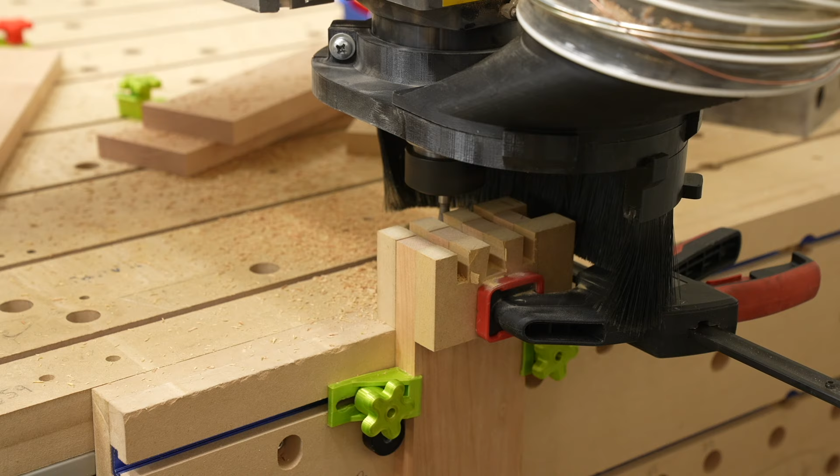Hey guys, this video is all about doing dovetails on the CNC. First, I'm going to talk about how to design dovetails in Autodesk Fusion 360, keeping in mind that you're actually going to be making it. Second, I'm going to discuss toolpaths in Fusion for how to machine out the dovetails without any chip out. And third, I'll show how I set them up and cut them on my CNC machine. This will be broken up into 3 videos, and the links for the other two will be in the description, so if you're interested in just that part, you can jump to those videos directly.

Okay, inside of Fusion, let's go ahead and create a new component. I'm going to give it a name of the drawer. Hit OK. And when we create it, it's already active, which is what we needed. Let me show the origin for that component.

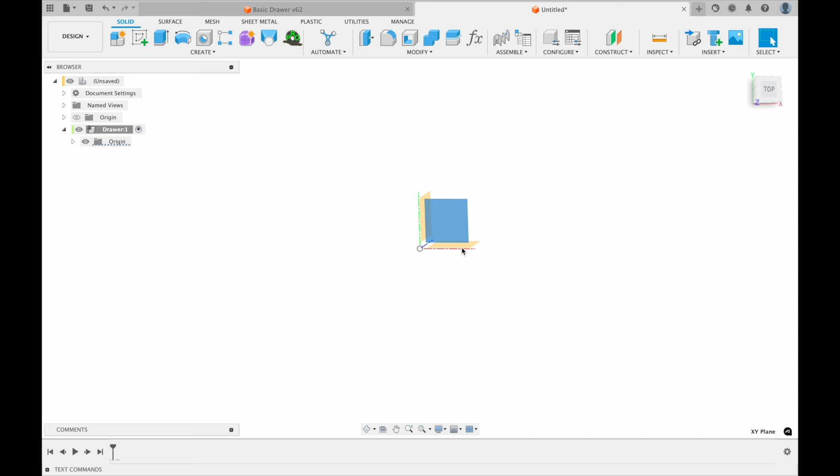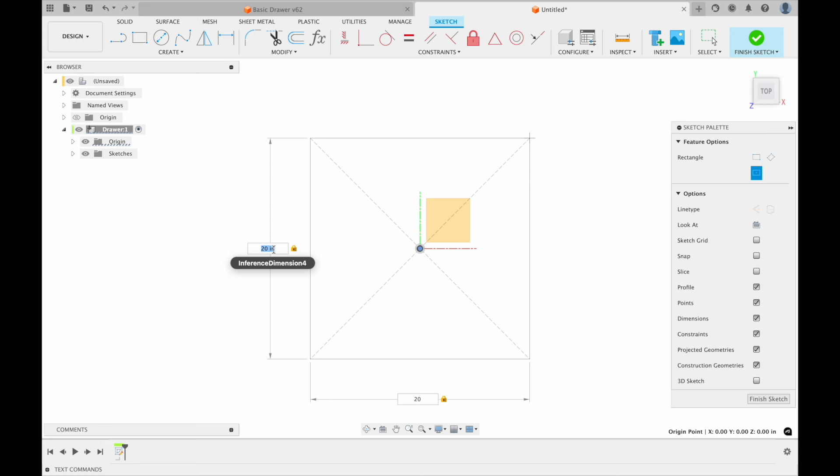Let's select the top plane, right click, create sketch. Let's go ahead and create a rectangle, center rectangle, and I'm going to select the origin as the center, and let's do the size of our dovetailed drawer. Let's do 15 by 20. 20 inches this one, 15 that one. And if I was going to do this for real, I would create parameters in the change parameters. Instead, we're just going to hard code it.

Now I want to offset these. Hit O for offset, and I'm going to select the edge here. I want to offset each individual one, and it'll become apparent why in a minute. So I'm going to uncheck chain selection, and we're only going to select a single curve. The distance we're offsetting is the thickness of our dovetail. Let's do 3/4 of an inch, and we want to go inside, negative 0.75.

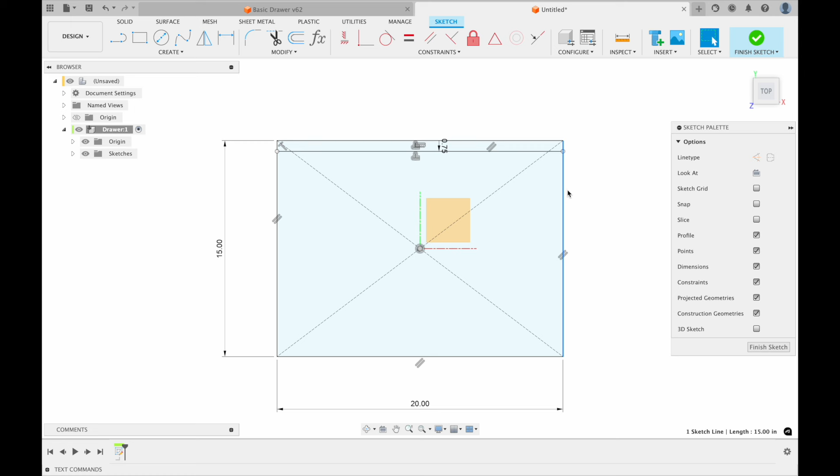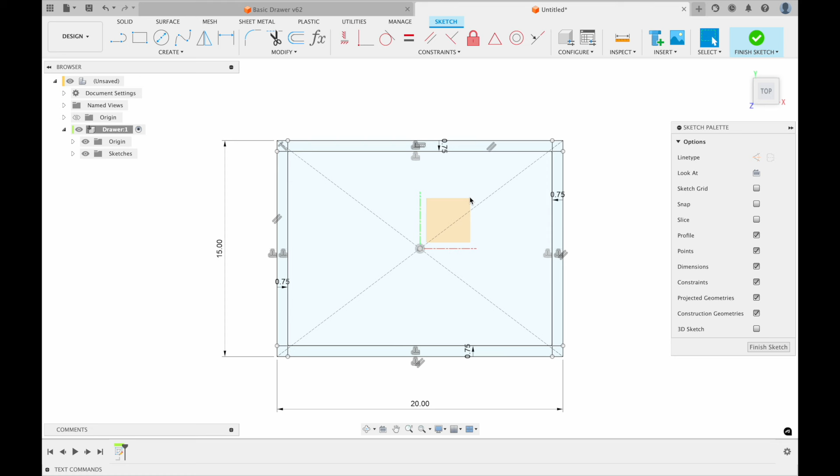Alright, and then I'm going to do the same thing for here. O for offset, and paste in this value, enter. Select this guy, O for offset, paste in the value, enter. Now we can go ahead and finish the sketch. Let's expand it, and let's name this drawer base.

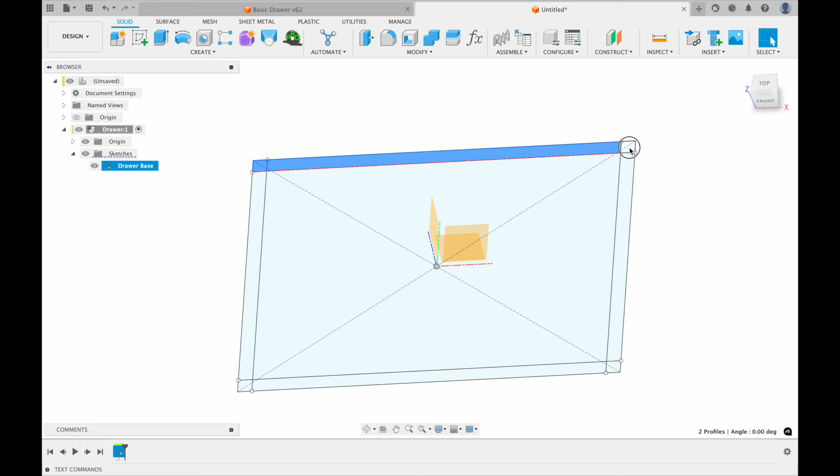Now we can start extruding the sides. I'm going to go ahead and select this profile, this one, and this one. Hit E for extrude, and let's go by the drawer height. Let's say we want the height to be 6 inches. Looks a little big, let's go with 5. And again, I would normally use parameters.

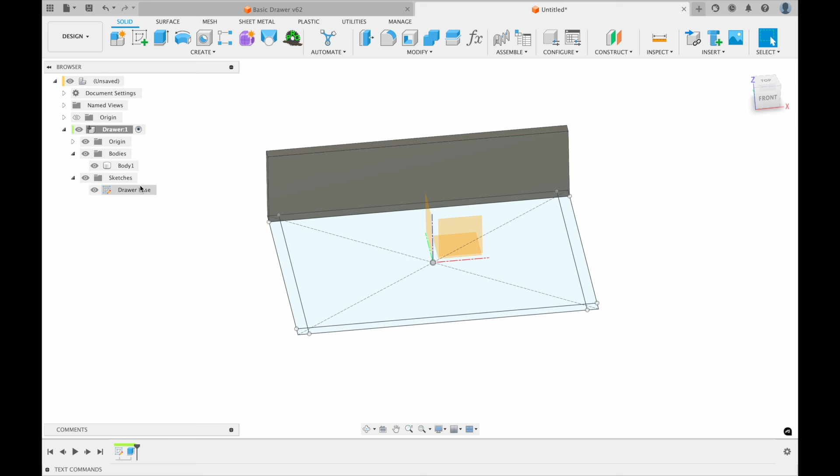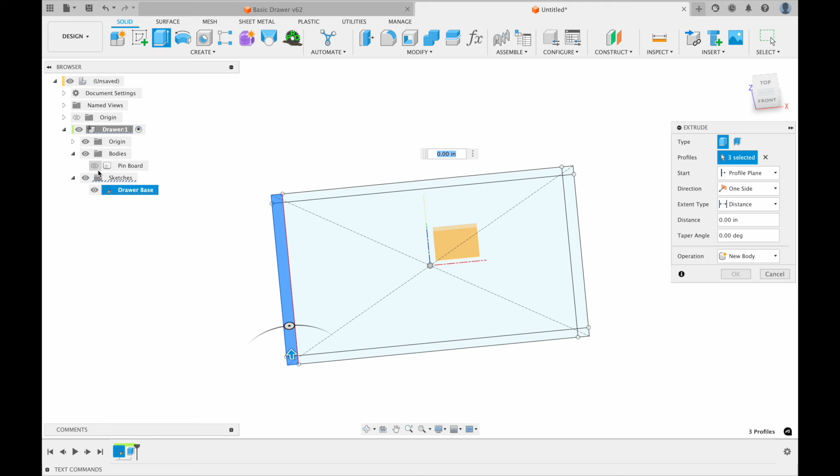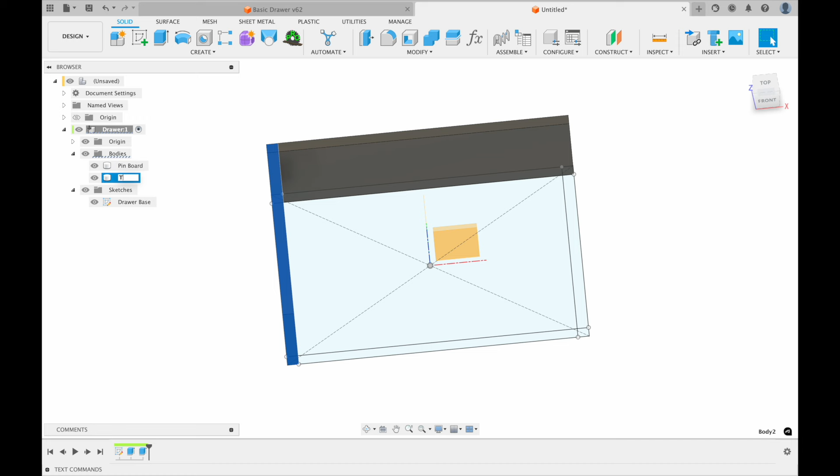Okay, let's go ahead and rename this body. The long one's going to be the pin board. Now let's hide the pin board and create the tail board. Go ahead and select the 3 for the other shorter region, extrude it, E for extrude, and we could do the same distance. I'm going to show the pin board, and let's just go to the top of the other one by selecting this, and we don't want to cut, we want to create a new body. Hit OK. So this is going to be the tail board, so I'm going to rename it.

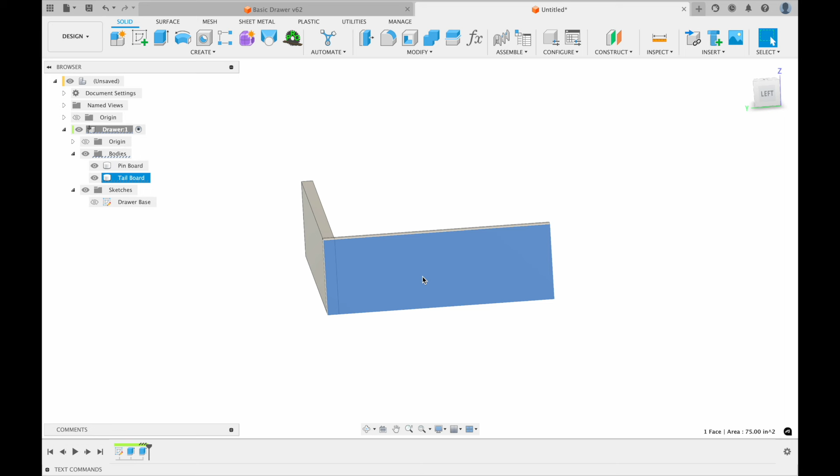Now we can go ahead and start actually drawing the dovetails. I'm going to hide the origin, and we don't need this drawer base sketch. I'm going to select this face on the tail board, and we're going to create a sketch on the tail board, create sketch. I'm going to zoom in a little bit, and I'm going to hit P for project, and I want to project the one other board. We can just easily do it by selecting the body.

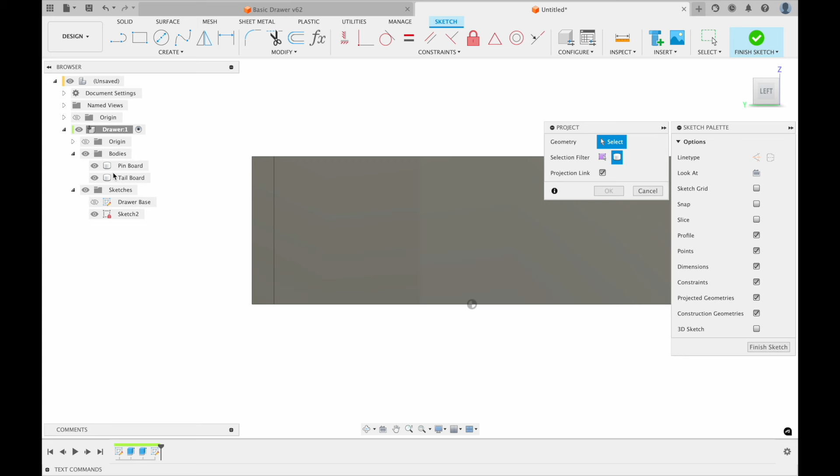We could actually do both of them, the pins and the tails. There are settings in Fusion to auto project. You can hide the bodies, and I'm going to rename this sketch to what I'm working at, and we're going to call it the pins. And I want to create symmetrical ones.

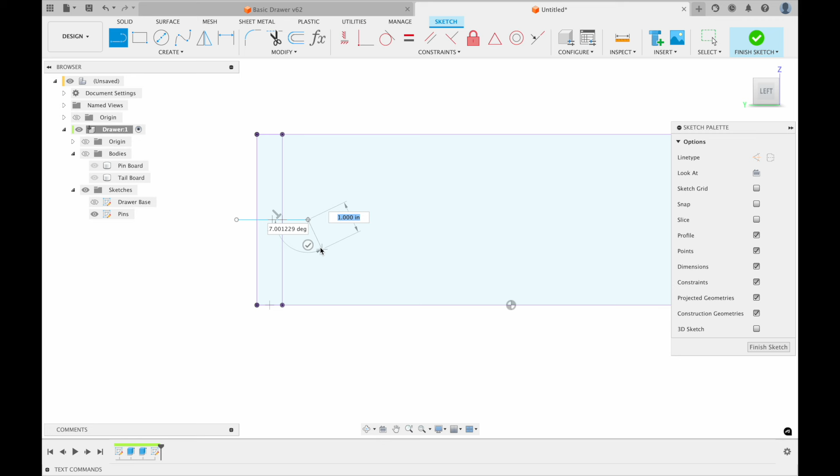So the first thing I'm going to do is create a line that's going to be for mirroring. I'm going to hit L for line, and I'm just going to move the cursor down the left side until the little triangle appears, and that's going to give me the center. Go out a little bit, drop a point, clicking, and then another one here. Then hit OK, and I'm going to hit Escape to exit the line tool, and select this line. We're going to just keep it here.

And let's go ahead and add constraints. I'm going to just drop this to these lines here, and constraints are created. So now we want to draw the line for the dovetail bit. I'm going to hit L again, and the dovetail bit would come in and go here like this. Now, to make it a little more obvious, let's change the orientation to make it a little easier to see.

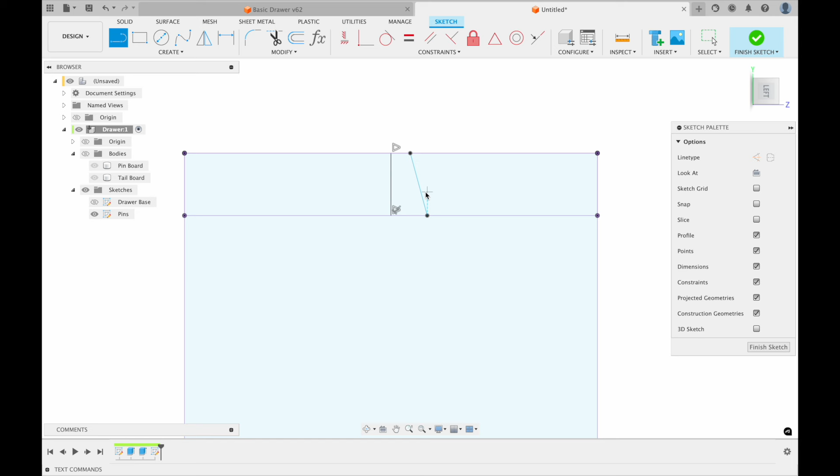Now we need to set this at a particular degree for the bits we're actually going to be using. I'm going to create another line that's perpendicular up, just for reference. I hit Escape, select it, hit X to make it a construction line. It goes to dashed.

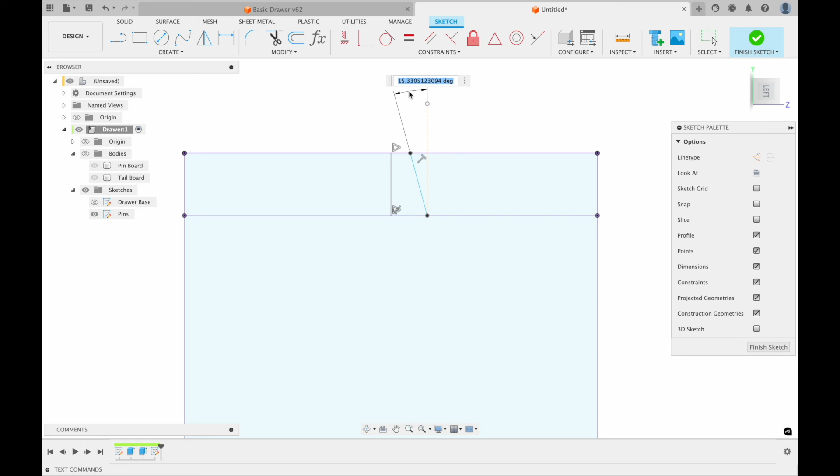Now I can select the construction line and my other line here, and create a constraint for the angle. I hit D for dimension, and we want to dimension the angle at 8 degrees, since an 8-degree dovetail bit is going to be used.

Okay, great. So hit Escape to stop creating dimensions. I can kind of tweak this around. Now what I'm going to do next is mirror it against this line here.

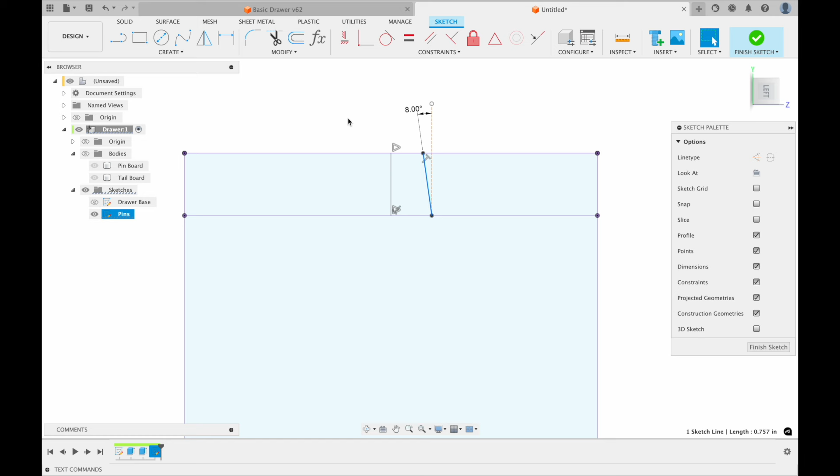So I'm going to select this, type S for search, and type mirror. We want to use the bottom one because that's the one for sketches. Mirror the line that's selected, and the mirror line, the place where it's mirroring at, is going to be this one. Hit OK, and that mirrored this shape here.

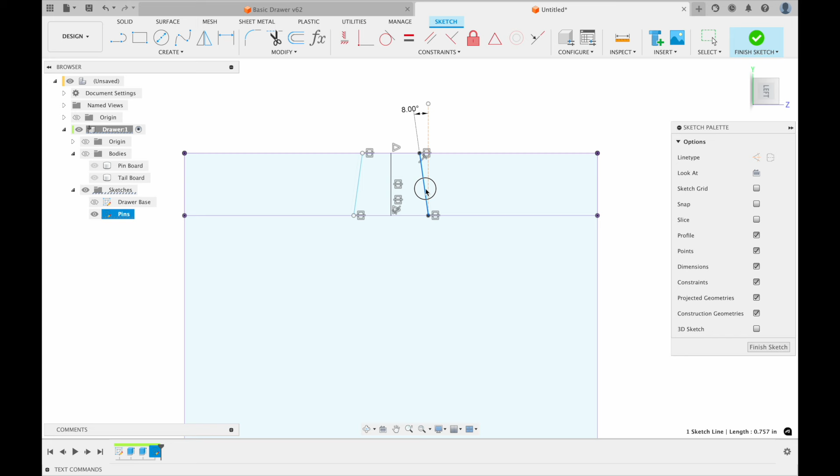We could tweak it, and again we'd want to parameterize it. We want to make sure that this bottom distance is at least as wide as your dovetail bit. That would be the basic tail that we could cut out right here. So we're going to start with it just like that.

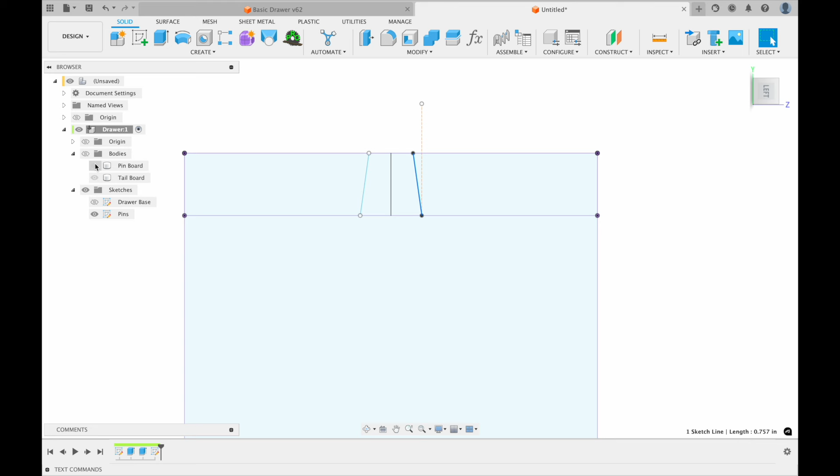Hit Finish Sketch. And let's show the tails. Hit Show the bodies. Let's hit the Home button. And let's show both just for easy use. Okay.

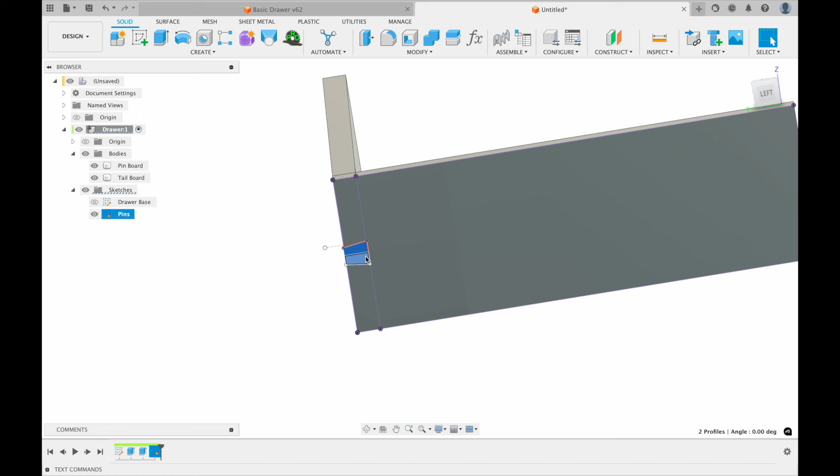Alright, so now we got to chunk this out. I'm going to select those two, and maybe I should have actually, in the pins, made the middle line a construction line. So I'm going to hit X and select it.

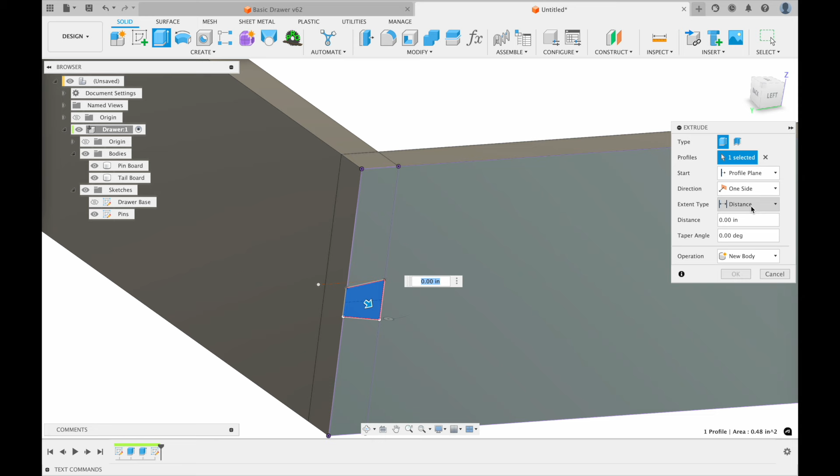Alright, so now I can select this profile here. E for extrude, and we're going to extrude to cut it out, which is what we want to do. We want to cut from this side and go all the way to an object, the inside here. You can see it's red, implicitly it goes to cutting.

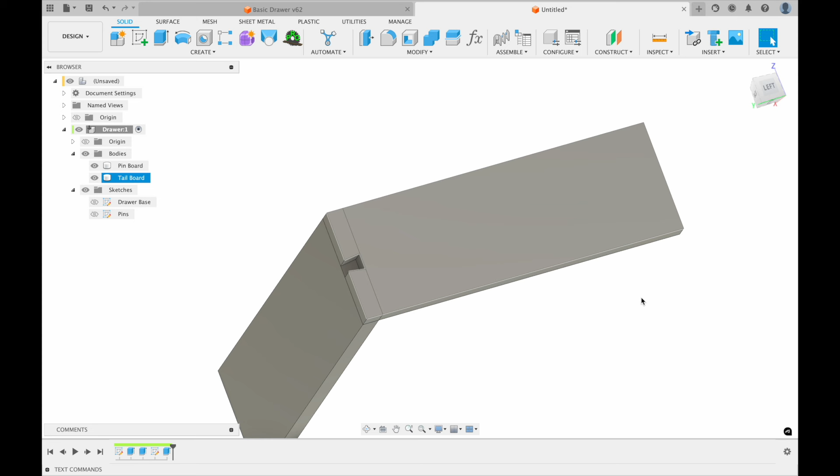Now we only want to cut the tailboard because that's what we're making right now. So hit OK. Alright, so that cut a hole in the tailboard. And yeah, that's great.

Oop, it cut a hole in both. So I made a mistake. Double click. We only want to cut the tailboard. Alright, let's hide the pin board for now.

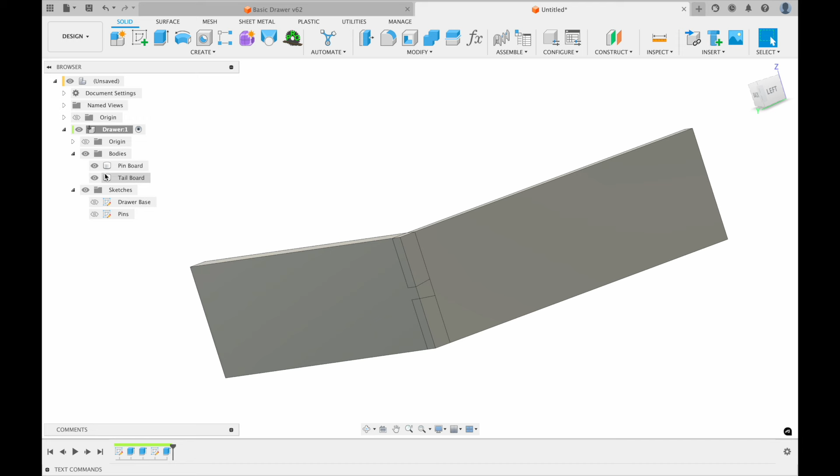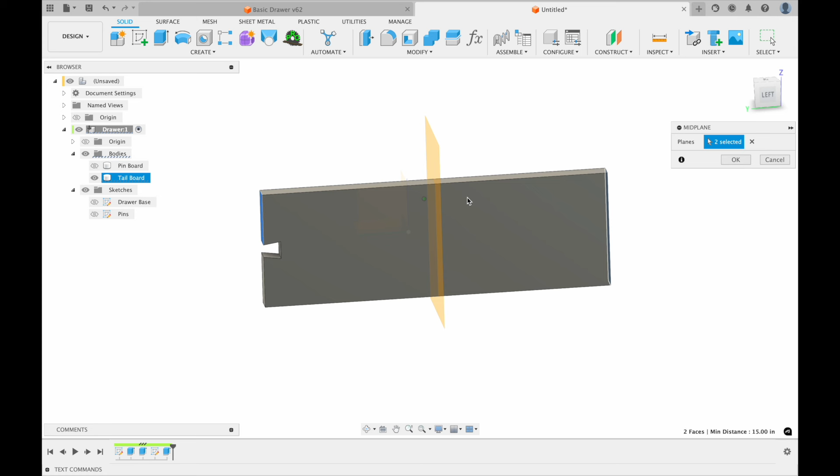Next, I want to mirror this shape from here, from this left side to the right side. We're going to go Construct and a midplane. Select this plane here, this plane here, and now I created a plane directly in the middle of those two faces.

So now I can create a mirror. Let's do a mirror, and I can never remember where anything is, so usually I just search for it by typing S. So let's do S, mirror, select it.

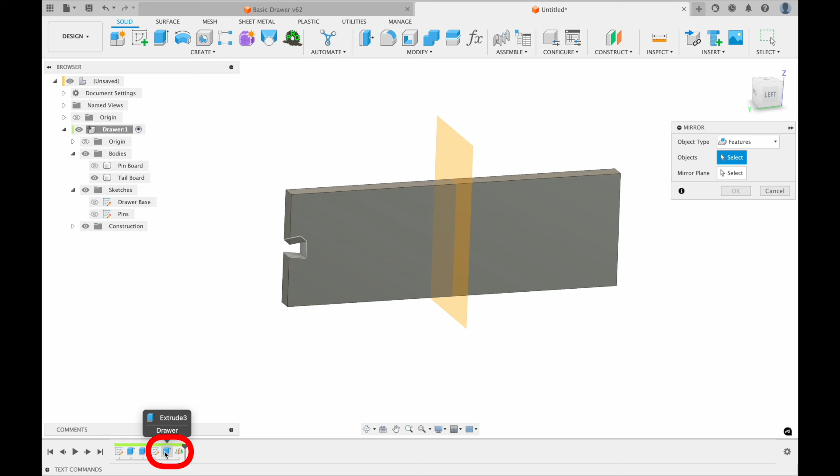What do we want to mirror? Well, I want to mirror this hole, which was a feature. So I'm going to go to Feature and select it, this one in the timeline. And then the mirror plane, hit select, there's the plane, and then hit OK, and it chunked it out.

Alright, we can hide the construction plane. We want to go and create a pattern to replicate this up and down on both sides. Create a pattern, a rectangular pattern. Perfect.

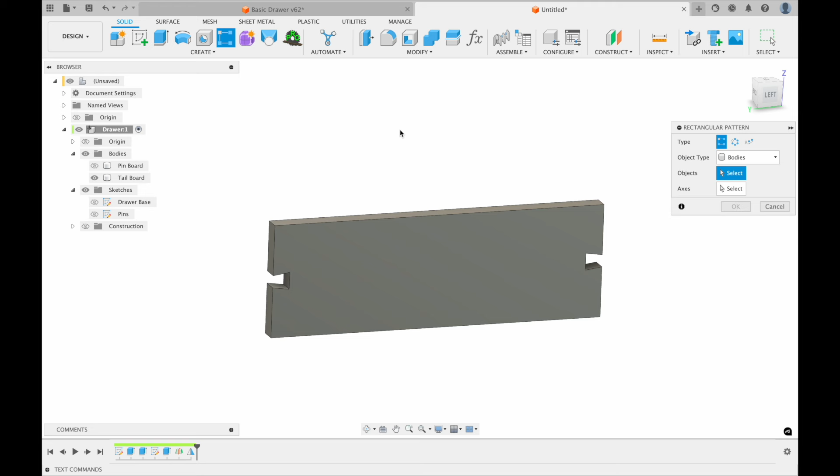We want to create a pattern of the feature, a pattern of the chunk out on the left and then the mirror on the right. So those two are selected. The axis, we want a pattern up and down, so I'm going to select one of these edges.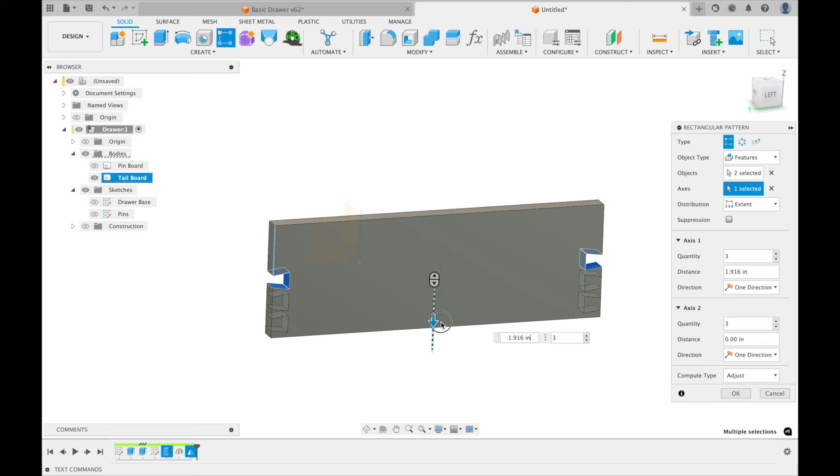And now if we drag up and down, we can see we're creating a replication of the tails, or actually the pin cutouts. And I want it— it's only going down, we want to go both ways. We also don't want to go left and right.

So on the other axis, I'm going to go to 1. And the up and down, we could change the amount in just a second, but let's change the direction to be symmetric. And now we can add a few more in.

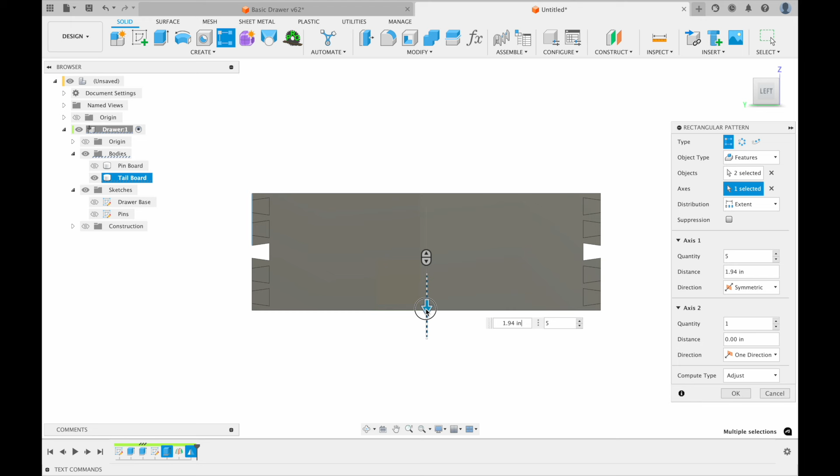So we need, it looks like an odd number to make it work correctly. And again, you can kind of space these out however you want, depending on the sizes of what you want for things. This is another area where it's nice to make it parametric.

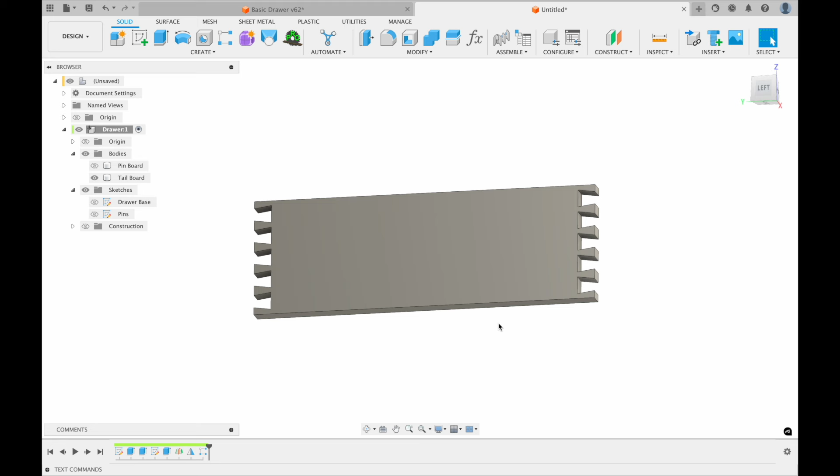I'm going to hit OK. And we created the tailboard, a bunch of dovetails. Alright, so now that we have that, we can go ahead and work on the pin board.

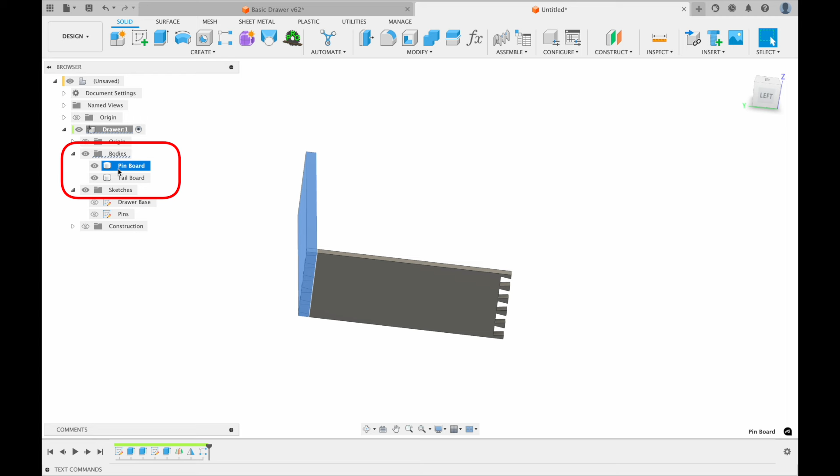First we need to chunk out this shape from the pin board, which means copying it over to the other side. We want to do it with components, so I'm going to start making components at this point. Shift click on each of these, right click, and create components from bodies.

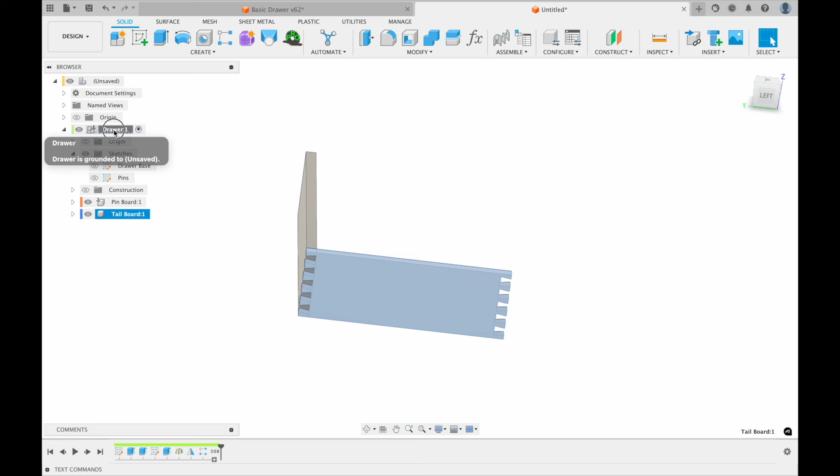That created them now as components. This tailboard I want to replicate, so right click and select copy, or Command C or Control C. Right click on my component up here, the drawer, and do paste. I'll just hit OK and not do anything for it.

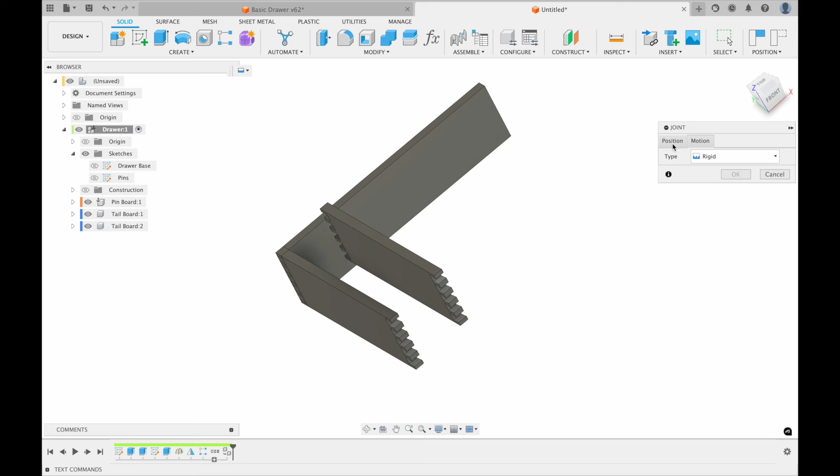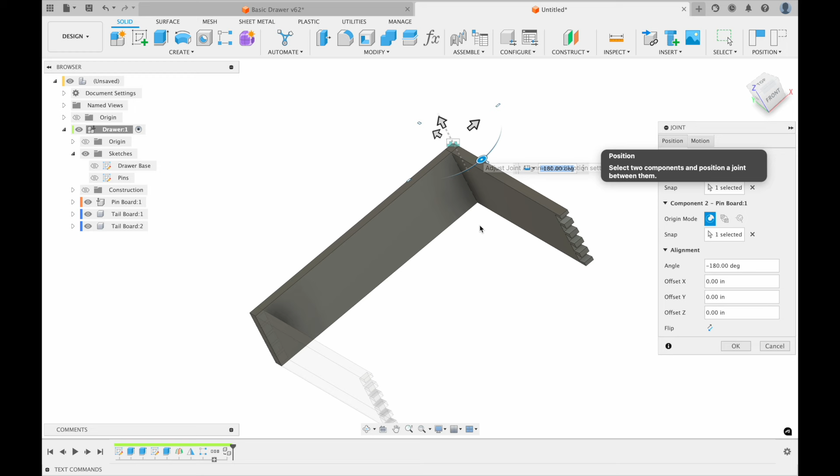What I want to do now is create a joint. I want this edge over here to be over there, so I'll do a joint. It's going to be a rigid joint, and the position is the hard part. I want this little corner here to go all the way over to this corner, but turned 180 degrees. That looks right.

Could also create a joint for the original one, an as-built joint between this guy and this guy. That looks right. So now everything is jointed and can't be moved.

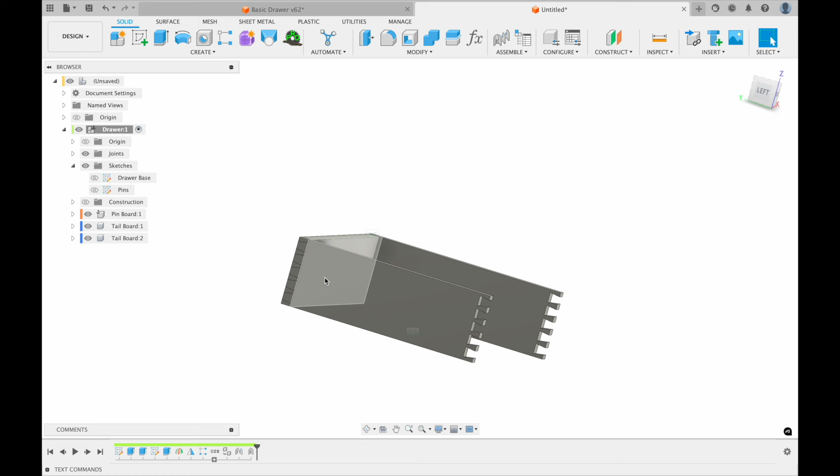Now that we have those two instances, we can work on the pin board. We don't need to activate it since we aren't creating anything new, just modifying. I'm going to hit combine. The target body is going to be this pin board, and we're going to use some cutters as the tool bodies, selecting cut.

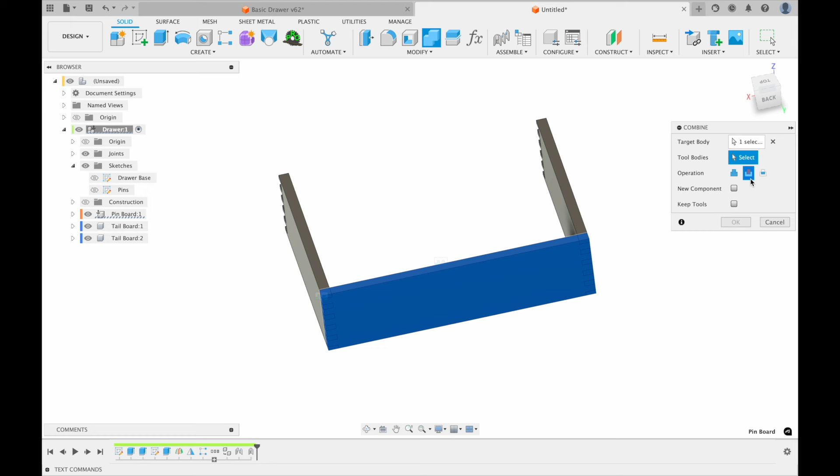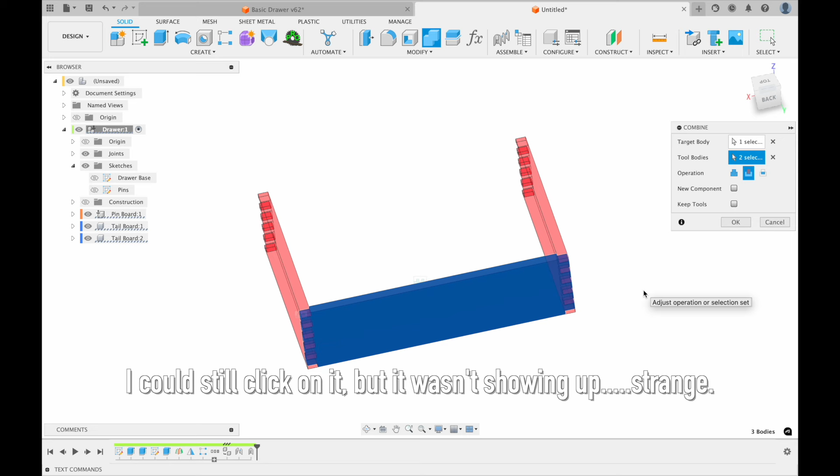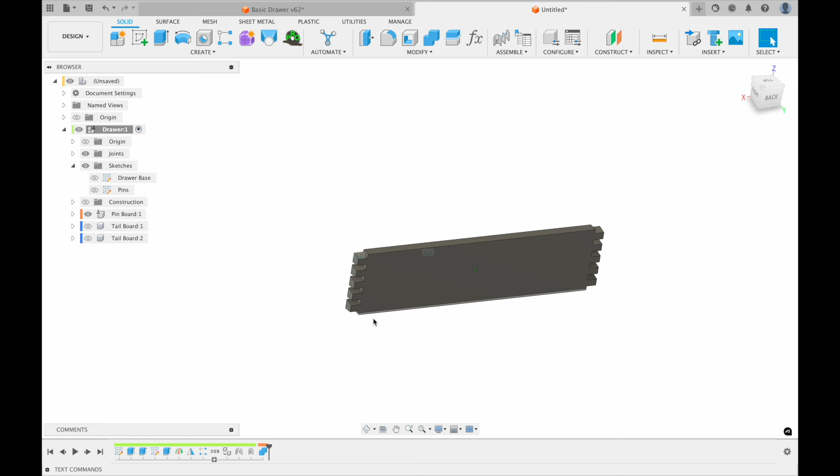The tool bodies are going to be this side and the other side. Alright, so I selected both. I'm not sure why it disappeared temporarily, that was a little strange. We want to keep them. Now if we hide the tailboards, you can see we have the pin boards cut out.

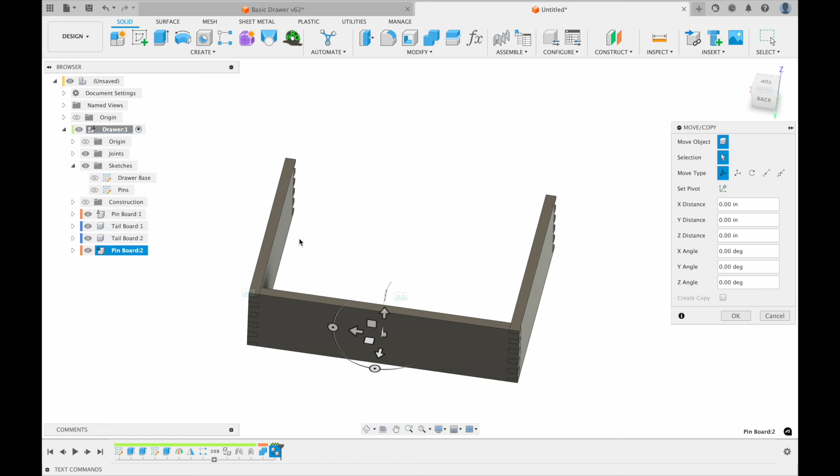So all we'd need to do now is create a joint where this one goes on the other side, and that would complete the box. Let's click on the pin board, right click, copy, drawer, right click, paste. Alright, so now this one needs a joint. It's also grounded right now, so I'll right click and unground it.

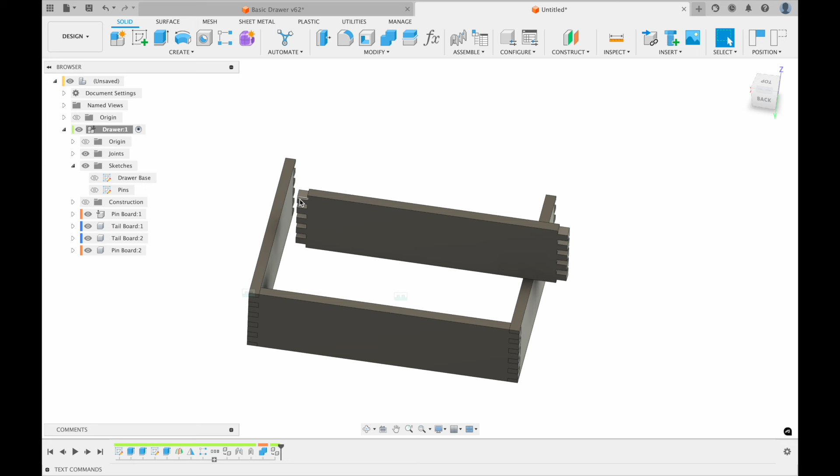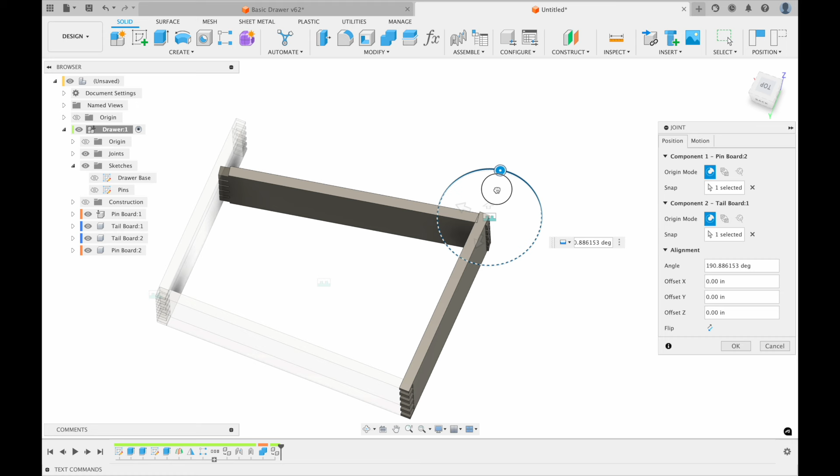We want to rotate it around so everything's in the correct orientation. That means this pin piece needs to go over here. J for joint, this little guy here needs to go right there. And then it's rotated wrong again.

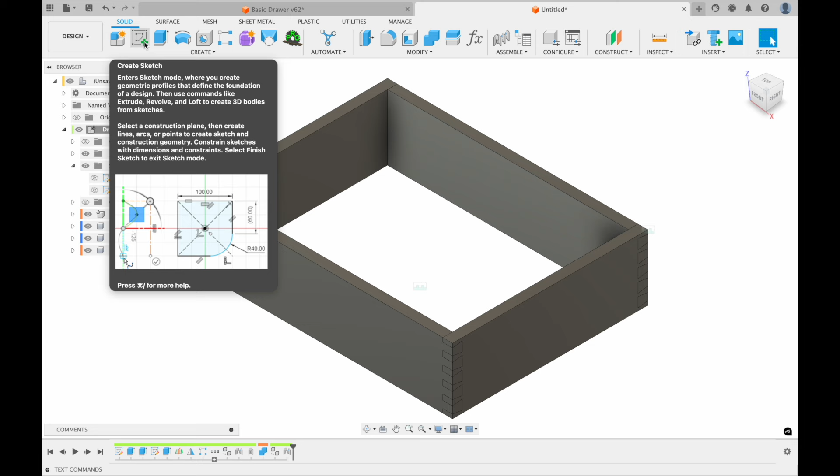So that's the basic dovetail box. We'd also want to add a bottom. Let's go back to the home orientation. There are other ways of doing this, but let's just do it one easy way. Go ahead and create a sketch on the bottom of one of these, R for rectangle, and have it snap to each corner.

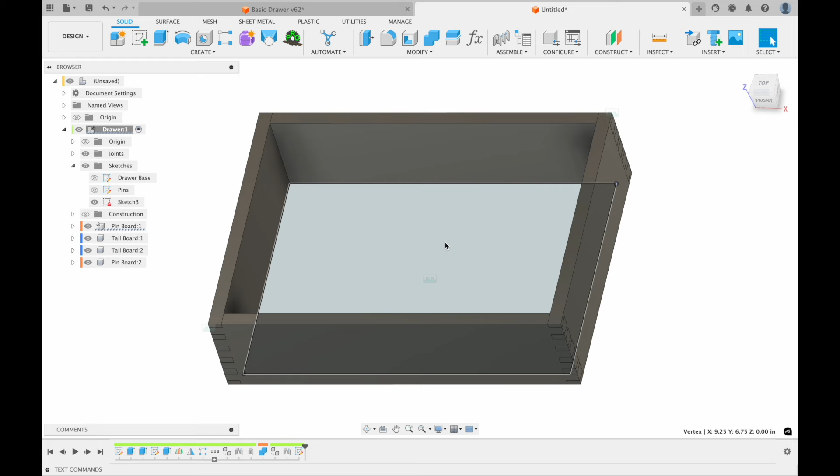This would fill in the whole area if I just filled it in, but we actually need it to fit in grooves. So let's go back and add that sketch. I'm also going to rename it, let's call it the bottom. Double click. It might be easier to hide the boards. I double click on this guy.

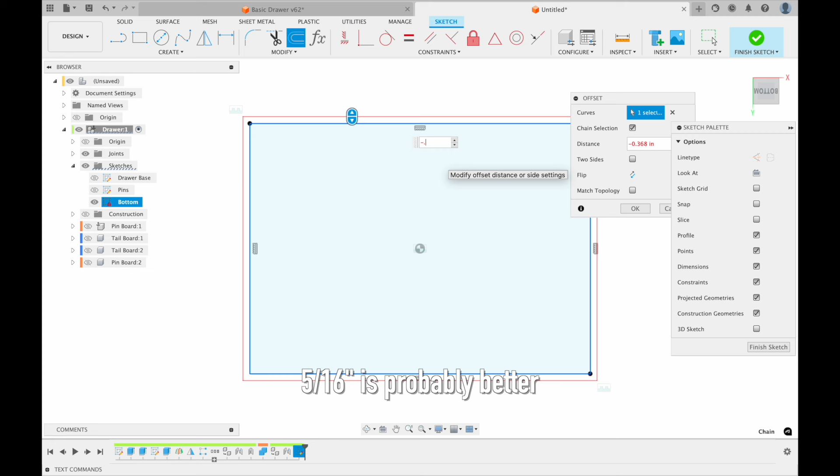We want to go into a groove, and let's say we want to create a 1/4 inch groove. Hit O for offset, chain selection on this one, and we want it to go out this way, negative 0.25, a quarter inch out.

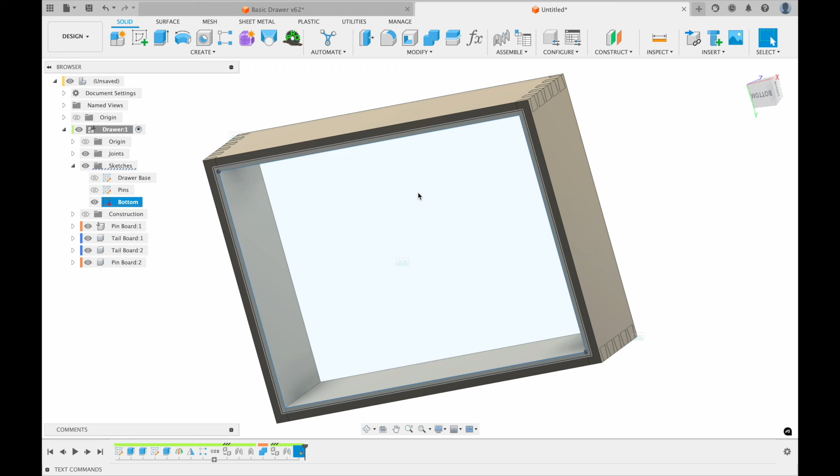Now I'm going to double click on this one that we already created and hit X to make it a construction. Finish sketch. Now we can show things again. Now I can select that bottom and extrude it, E for extrude, and we want to go up.

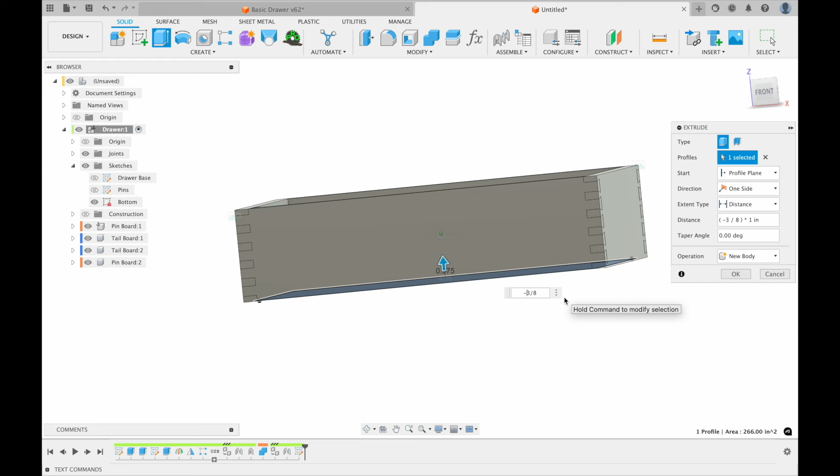Let's say we want the drawer bottom to be 3/8 of an inch thick, going up. For some reason it has to be negative because of my orientations. Looks like that would go up. If you ever have trouble figuring out where stuff's going, you could easily fix it by using an analysis.

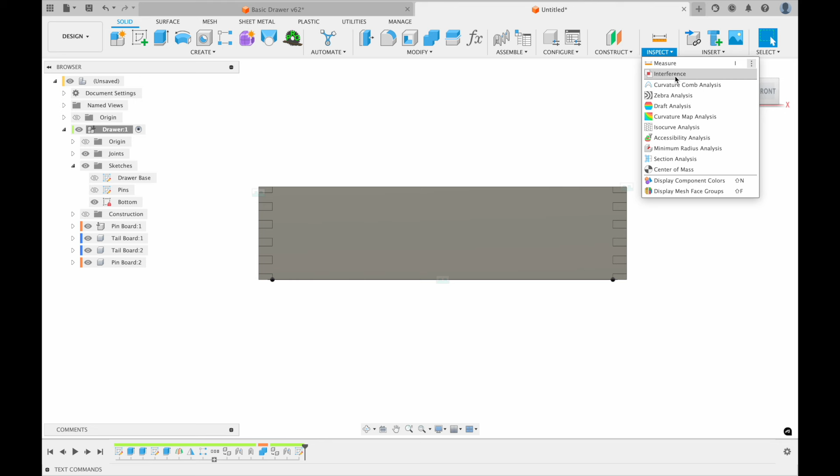So I'm going to go ahead and do that. Let's go to inspect and do a section analysis of one of these planes. Alright, this should make this operation a lot easier.

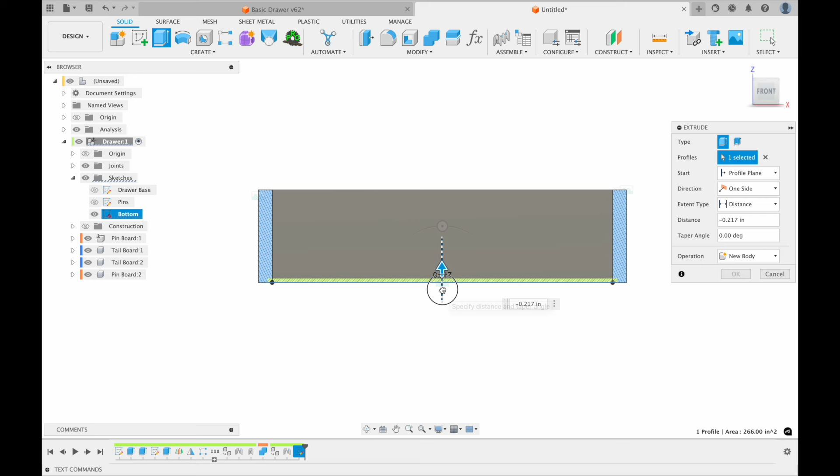Back to selecting the bottom profile, E for extrude. Look at it from the front. We want it to go up, negative 3/8 of an inch in this particular case, but we want a bottom offset. So the start is going to be the profile plane, and we want an offset from that plane. Let's say we want 1/8 of an inch on the bottom, 0.125. That gave 1/8 of an inch inset from the bottom.

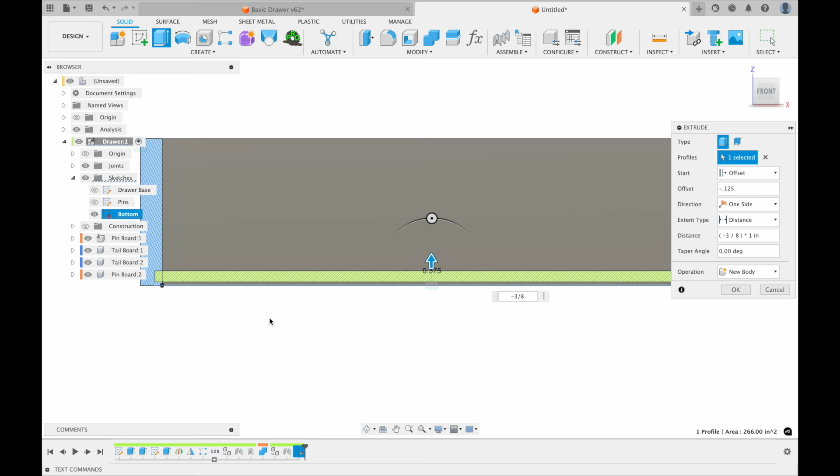Okay, great. So let's hide the analysis there. And we are going to take this oversized bottom piece. In fact, let's go ahead and rename it to be bottom. Right click and create component from bodies.

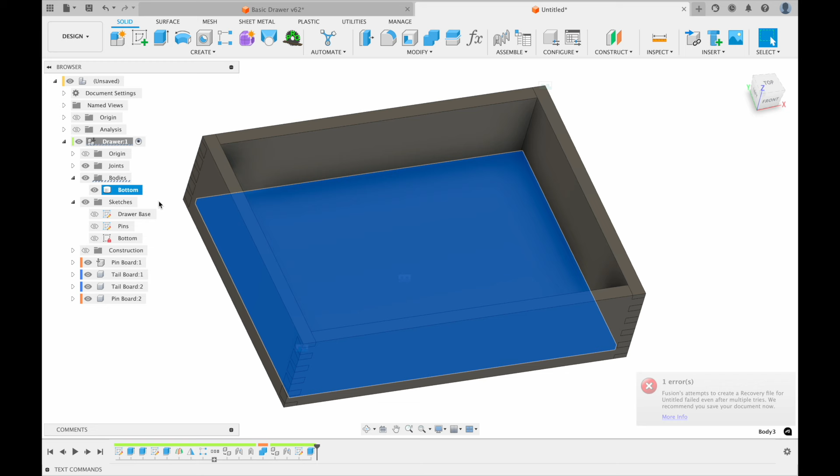Let's do a combine, and we're going to cut out a slot for these guys. Target body is going to be one of the pins. We're going to do a cut, keep tool, and the tool body is going to be this guy at the bottom. Then hit OK. We're going to do the same combine for the other side. I'm going to have to choose one because of how we rotate stuff here.

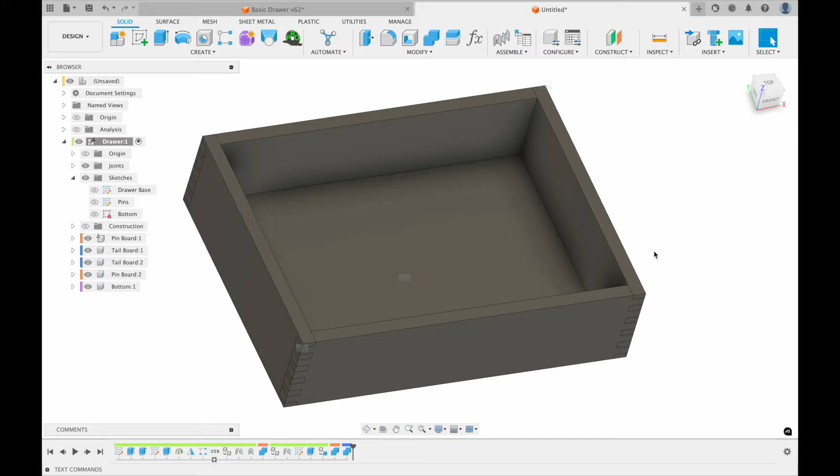Alright, so now if we go ahead and look at that analysis, we can see we have a nice slot in here. But really would want this to be inset if you're going to really make it, because you need to have a gap. And we could just make the bottom be a little bit smaller, and that way we'd have a gap for expansion of a solid wood bottom.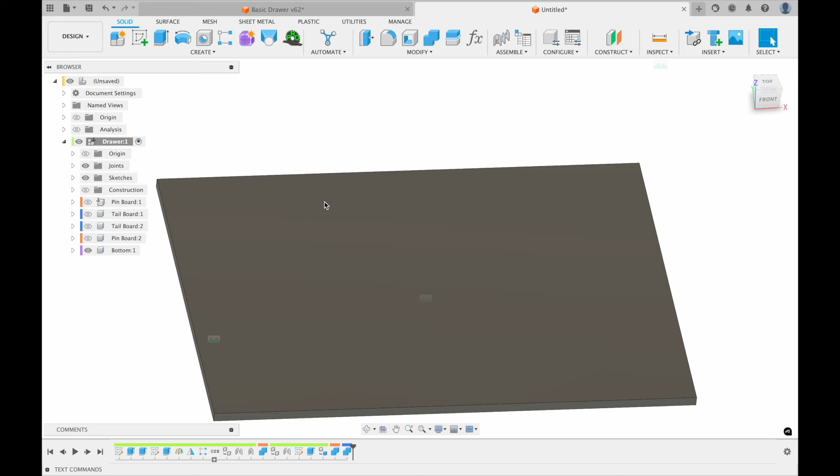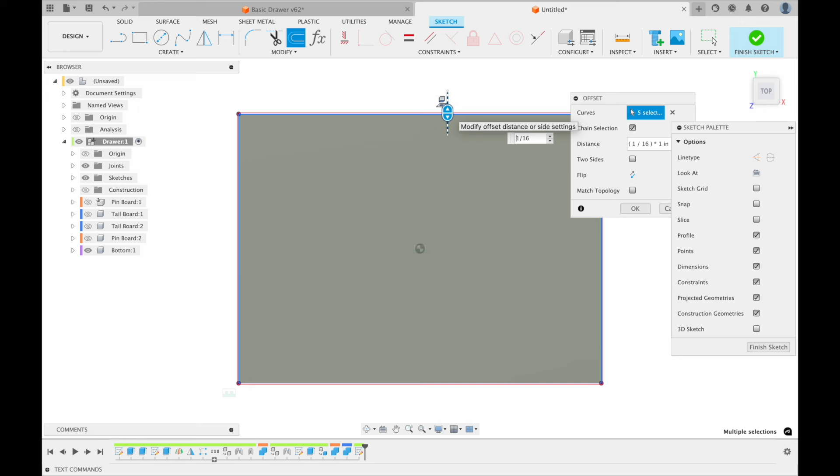So we could go ahead and do that. Let's hide these guys, hide the analysis, go to the top, create sketch on the top of the bottom piece. P for project, and select that body. Okay, double click on the outside edge to highlight it. O for offset, and let's say we want a 1/16 of an inch gap on the inside. It needs to just make sure it goes on the inside. Alright, let me zoom in a little bit.

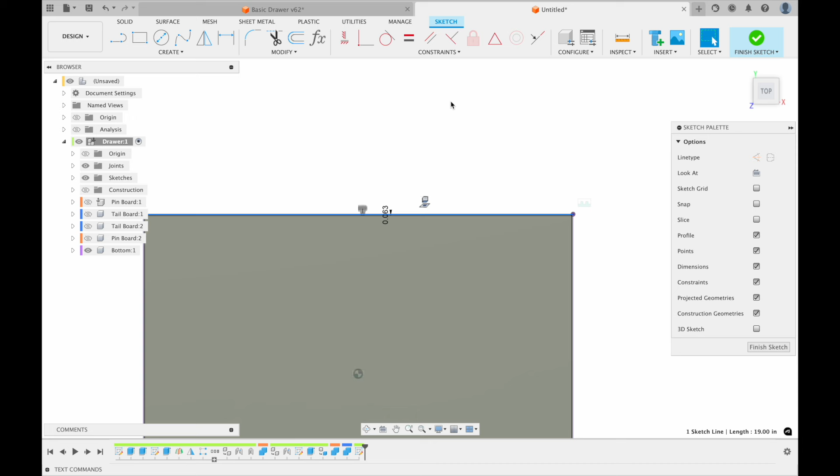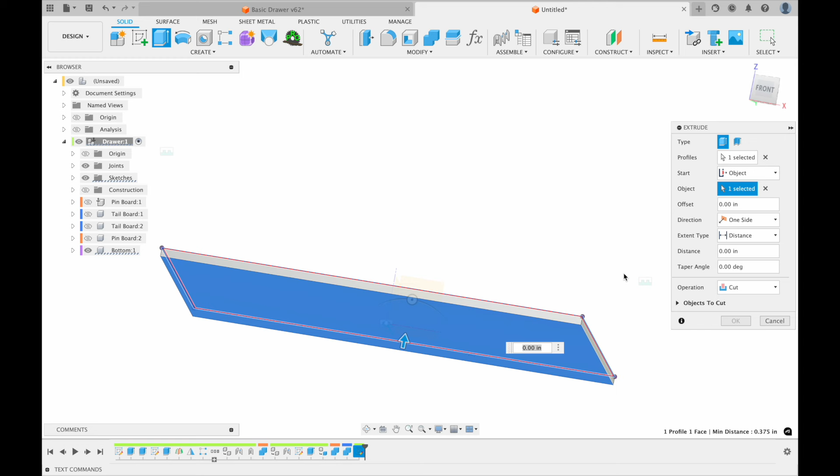Now we can go ahead and select this little thin area in between, and we can extrude it out and cut this guy to be smaller. E for extrude. Let's see if I can select it. There we go. And we're going to extrude from there to an object, the bottom side here, and we're going to do a cut. Make sure it's cutting the bottom, and if things aren't done right, okay. There we go. I don't know what I selected wrong, but now it's working correctly.

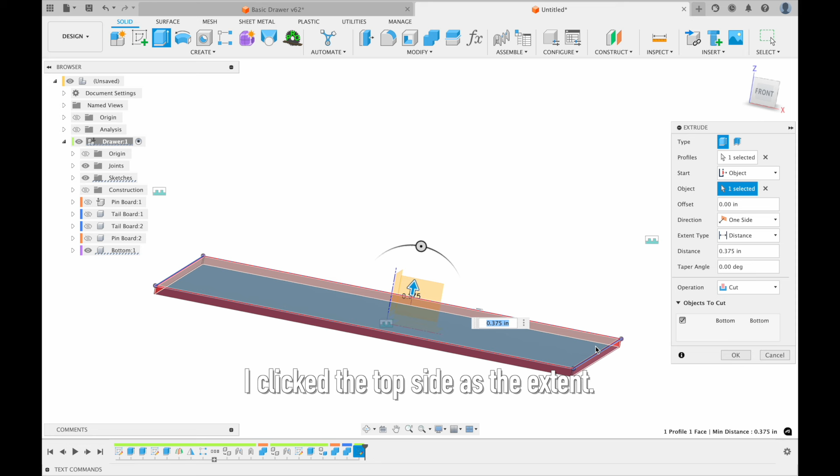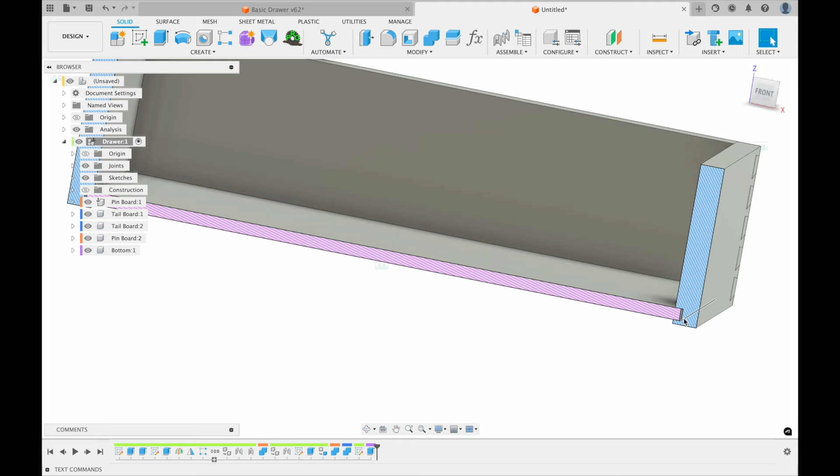Now if we go and show everything, and we go ahead and look in analysis, you can see that we have enough spacing here. We might have wanted to have the bottom go in a little bit further, and so we probably would have maybe made the offset be a 1/4 inch plus a 1/16 of an inch, and then do this subtraction after. One other consideration is that if you are going to cut those bottom slots on your CNC machine, you're going to have a round edge on them.

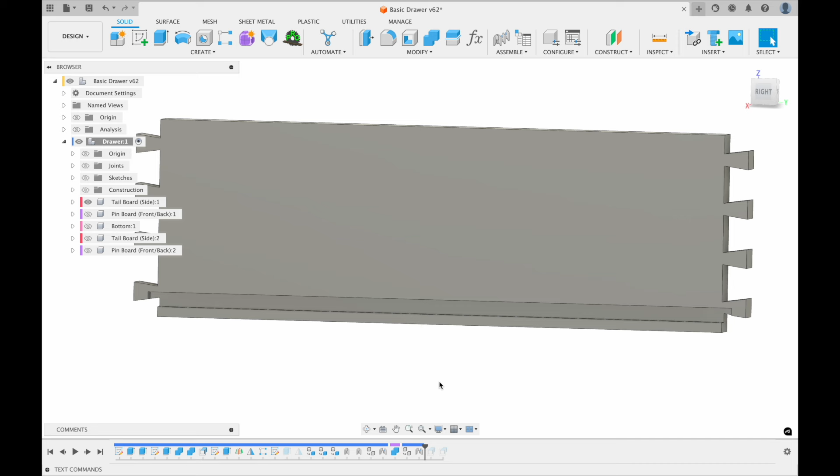So it might be better to overcut that edge a little bit. The way I handle that is I will just go ahead and offset the faces inside of Fusion for the bottom slot to be a little bit larger, like say a 1/16 of an inch. So to do that offset, I would take each of the sides, find the part of the slot here that needs to be a little bit larger, and just offset it.

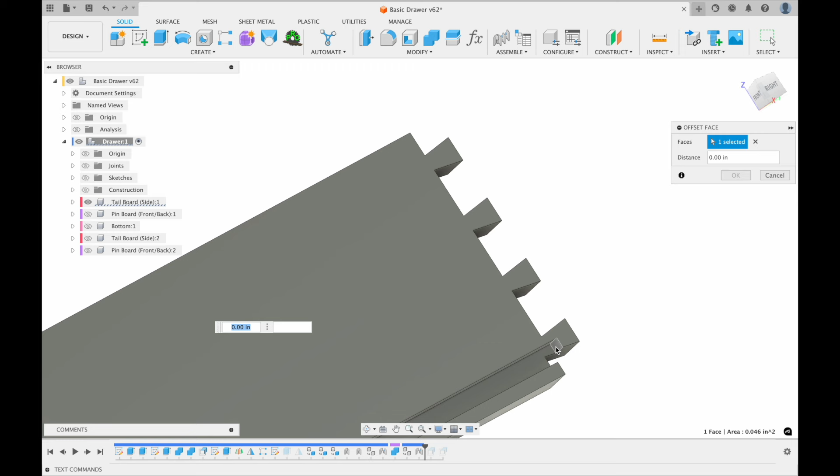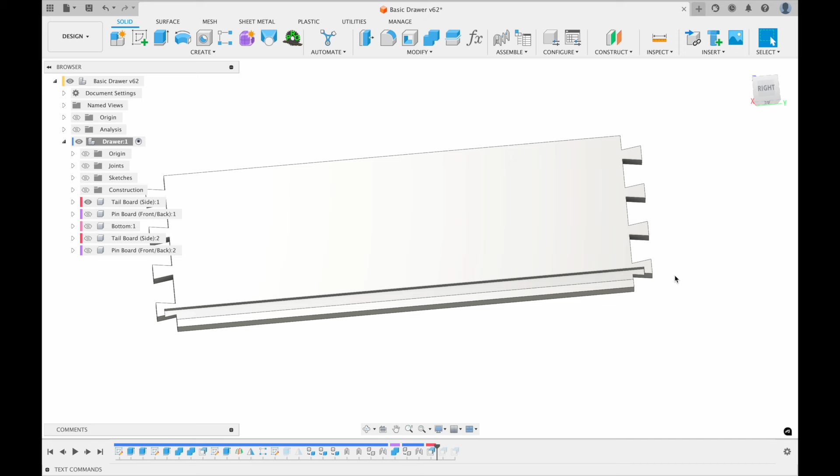I'm going to type S and then type offset. Offset face is what I want. I want to select this face here, go to the other side, that face here, and we want to offset them out so it cuts it. We probably want to do it by the radius of a bit. So if we're using a 1/4 inch bit, let's go by 1/8 of an inch outwards, and then hit OK. That way we can cut the slot and not have it interfere with the bottom.

So that was a walkthrough on how I'd actually go ahead and create this, but the way I would really do it would be to use parameters. So you can download the version that I did, and if you hit modify, change parameters, I did the same thing that we did before, but for everything I input a number, I just used a parameter that I assigned to it. The advantage of this is that I can go ahead and change anything on the fly.

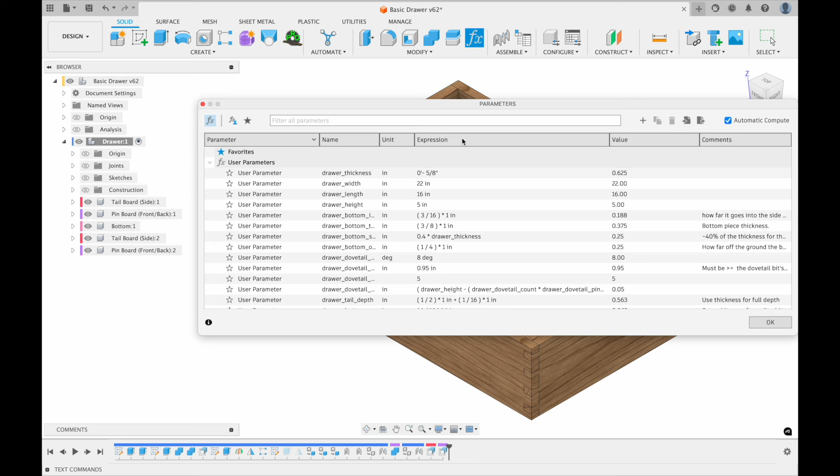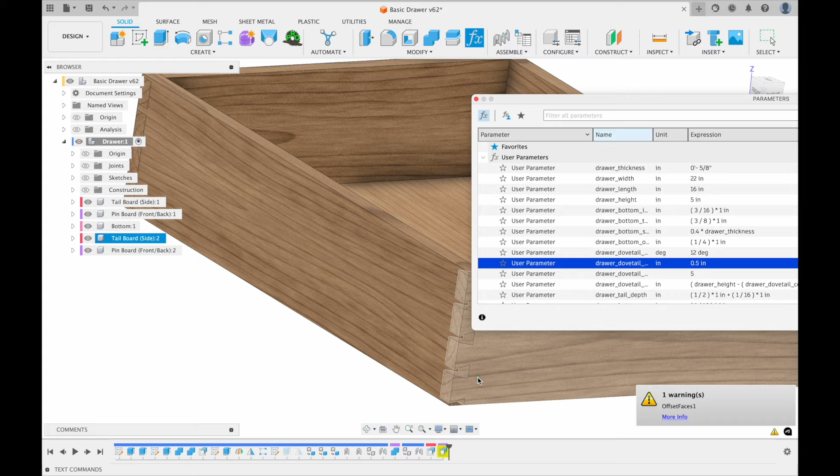So instead, if I wanted a 10-degree dovetail or a 12-degree, I could just type 12 deg, and it would change my dovetails on the fly to be 12 degrees. If I wanted to have the dovetail bottom be a little bit smaller, 0.5, and yeah, that's a lot easier to work with.

So that's the basics on how I do the CAD in Fusion 360, and now there are a lot of other ways to do this, and this is just one way to approach it. You might want to just hand lay out the actual dovetails in the CAD based on the 8-degree dovetail bit and put the lines exactly where you want them, and that's totally fine.

So stay tuned for the next video, which will be doing the CAM and the toolpaths. Thanks everyone.